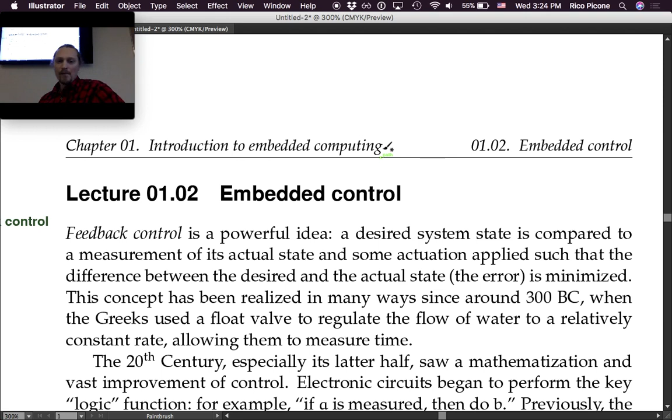So it all revolves around control, though. That's really what we're doing with it, we're doing control. So let's talk about that for a minute. Feedback control is a powerful idea. A desired system state is compared to a measurement of its actual state, and some actuation is applied such that the difference between the desired and the actual state, which we call the error, is minimized.

So, for instance, say we have a height-controlled platform, and it is at this height here. We want it to be at this height here. We measure this height. We know which height we want it to be. The distance between those is the error.

And we're going to do something to the platform, for instance, actuate it with a power screw or something like that, to make it go from this location to that location, to make the error smaller. Zero, preferably. So that's the idea of feedback control. We measure the error, we do something to the system to try to change the fact that there is error associated with it.

This concept has been realized in many ways since around 300 BC, when the Greeks used a float valve to regulate the flow of water to a relatively constant rate, allowing them to measure time. So if you can regulate the flow of water to a constant rate, then you could say, oh, you better be back by five buckets' worth of fill-up. Then it would be a specific increment of relatively constant time.

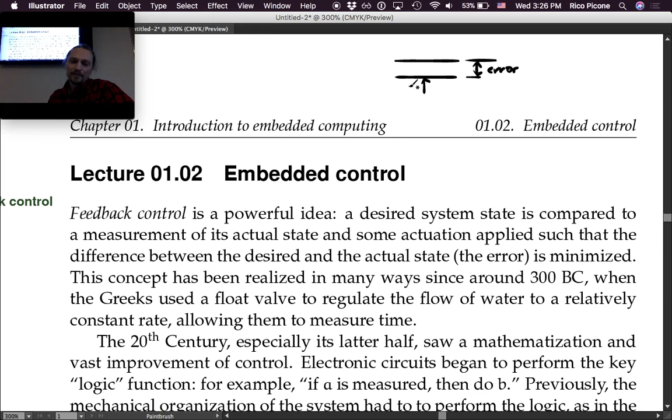And so the Greeks from about 300 BC, that's the first evidence that we have of people using this concept, although it's probable, because we don't have evidence of everything that's happened, that there was something before then that was like this. It's hard to say. Now, this is human-used feedback control.

Biological processes use a ton of feedback control. Our bodies are filled with feedback control systems. A lot of measurement and changing of response based on a certain state. Regulation of body temperature is an example of that, regulation of oxygen levels, all kinds of things have these feedback mechanisms.

For instance, if you try to hold your breath for a long time, all kinds of different system responses will happen to try to get you to breathe, right? If you're asleep, and you're like me and you have sleep apnea, you go to sleep and you stop breathing, your body will wake you up to start you breathing again. And it might even need to use adrenaline to do that, which really sucks when you're sleeping. But yeah.

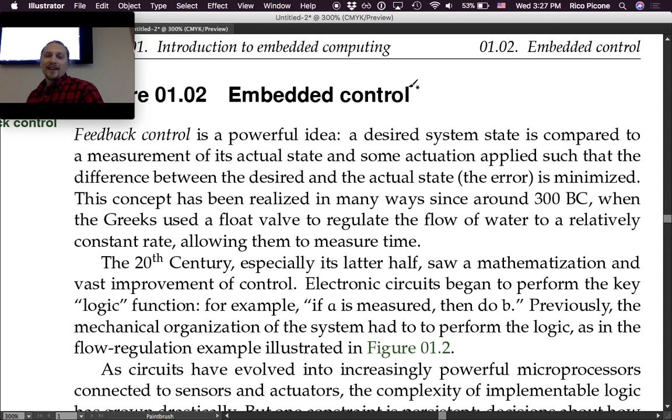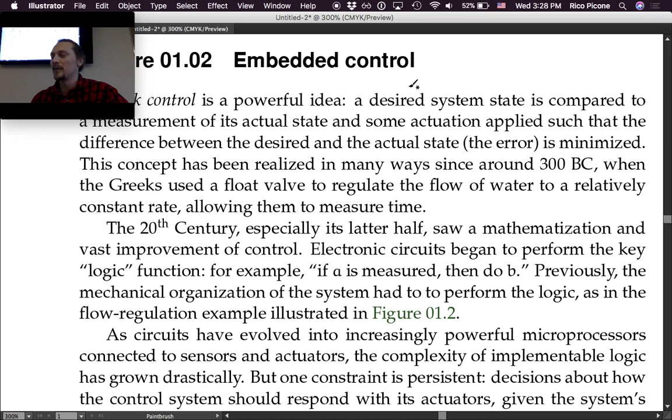Human-created feedback control, we have evidence back to about 300 BC, which is a while. The 20th century, especially its latter half, saw a mathematization and vast improvement of control. Electronic circuits began to perform the key logic function. For example, if A is measured, then do B. Previously, the mechanical organization of the system had to perform the logic, as in the flow regulation example illustrated in figure 1.2.

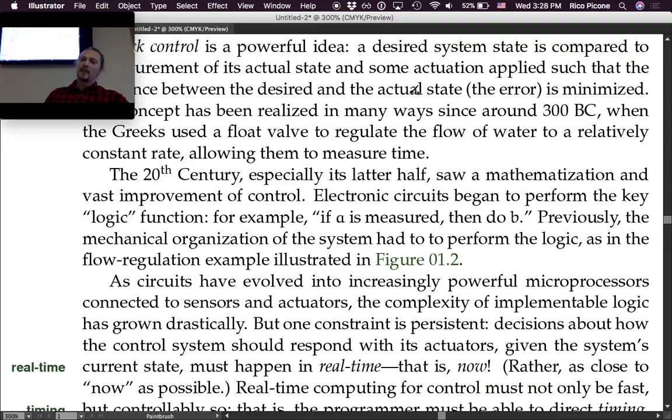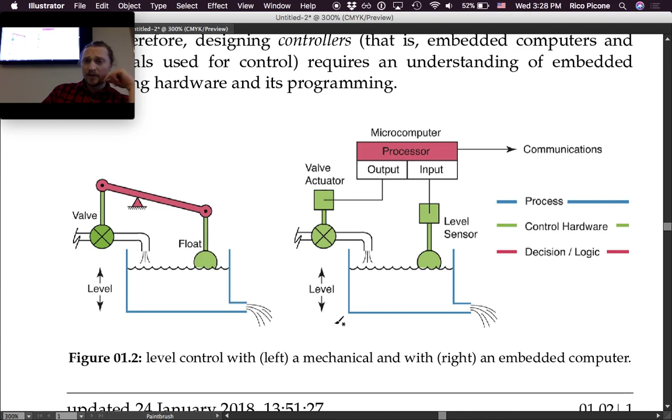So let's go down to the figure for a moment and take a look. So on the left, we've got the mechanical version. On the right, we have the embedded computer version.

You can do this task with the version on the left. If you want to control the level of the water in this tank to be constant, then if this starts to fill up, so say the water level rose to here, that means that your float valve, so a float is going to be something that stays at the height of the water, right? So it's going to rise, it's going to go up,

and the valve closes, or at least gets more closed than it was, and so your input stops or slows, and you're still flowing out. So that means it's going to make the level drop. If the level drops below the level that you want it to be regulated to, then you have the situation where this goes down and this happens, it opens the valve,

and water flows in, more water flows in, faster and faster and faster. The further down this goes, the faster the water is going to flow in until it gets back to the sort of calibrated height, the desired height. So, does anybody know of a system that uses this? Toilet uses this. I mean, at least American toilets do.

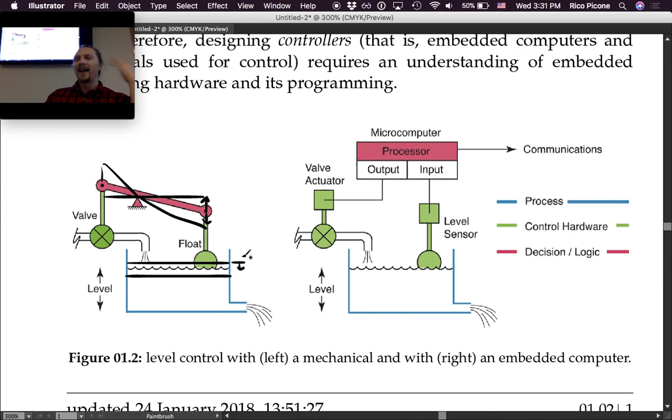It's a pretty good system, although mine gets stuck a lot. You got to jiggle the handle. Probably should open it up and fix it once and for all, but instead I just wait to hear if the thing falls or not and jiggle the handle. So we aren't really very good at making good decisions. We say, I could save 5 minutes right now if I just jiggle the handle instead of actually fix this. And so you do that for several months, and you waste 5 hours of time. So it's great.

And so this is the mechanical version, and it's really good. For a toilet, that's a great system. Works really well. They do break, but not very frequently. It's pretty reliable, cheap, does the regulation. Now, you could replace that with a microcomputer, and you probably wouldn't want to do it on a toilet, although I have seen a lot of electronic toilet stuff out there, so maybe you would.

But most of the time, you're probably not going to want to do that for a toilet, but for a more complicated system, you might want to, especially if you wanted more control than this afforded. This pretty much gets you stuck at a certain level. Once this thing is calibrated, you can't change what the level is going to be, right? On this system, you could easily determine which level you wanted it to be at and change that on the fly whenever you wanted to.

Also the breakdown time, this one in some year might break, but that one might last longer. Yeah, and it really depends on the hardware. So sometimes the mechanical system is more reliable, sometimes it's less reliable. Just kind of depends on what you use. If you use plastic parts over here, those things tend to break pretty quickly, but if it's a nice old tank toilet, it might last for a long time. So this is the microcomputer one.

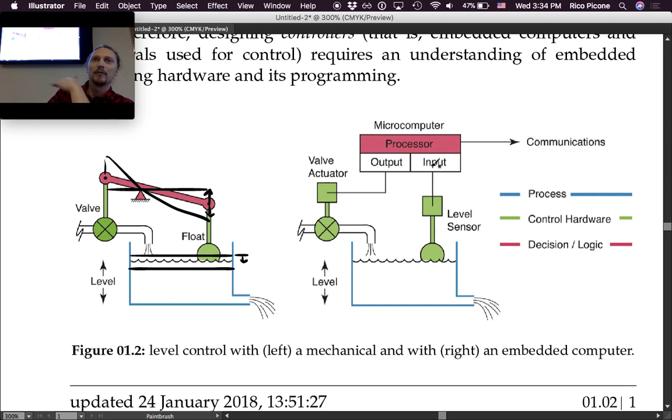and then it puts out a valve actuator signal, say a solenoid signal or a motor or something like that actuates the valve, and it makes the decision about what to do. So notice that it's performing this sort of decision and logic function. So in this case over here, this linkage took us from a movement of the float to a movement

of the valve. And the choice in the lengths of the arms, this one being this long versus this one being that long, the shape of that linkage, where it's pinned, those have influence on how this decision or this logic is being made. And it's cool, and it's adjustable to a point, right? And you could maybe contrive to have an adjustable version of this.

That's the part that the microprocessor completely just substitutes in for. So that's the only part that we're really changing. Everything else is kind of the same. Nothing else really changes other than the fact that the logic, the decisions are being made by the microprocessor instead of the physical system's organization.

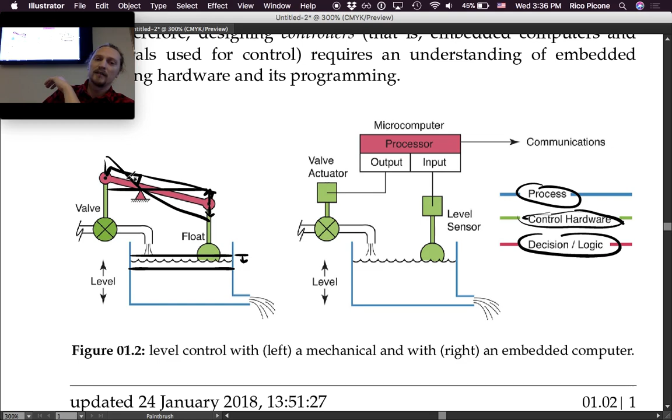So sometimes in a control problem, we're going to talk about three different aspects. There's the process. So that's this tank that has water at different heights. There's the control hardware. So that's the sensors and the actuators. Sensors and actuators are typically called control hardware. And then there's the decision and logic, which happen inside the microcomputer. So this is the same as over here, but the decision and logic, instead of being made by the linkage, it's being made by the microcomputer. All right.

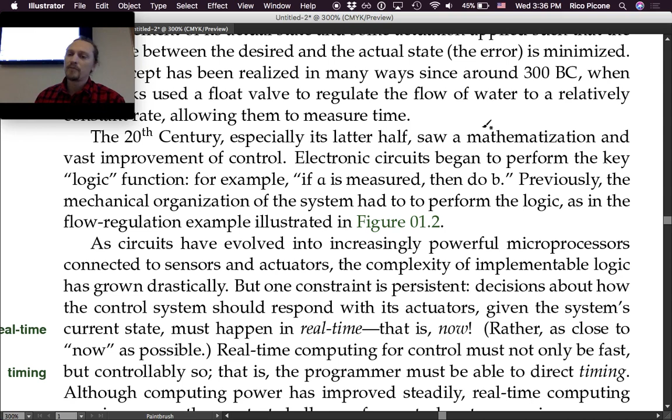As circuits have evolved into increasingly powerful microprocessors connected to sensors and actuators, the complexity of implementable logic has grown drastically. But one constraint is persistent. Decisions about how the control system should respond with its actuators, given the system's current state, must happen in real time. That is now. It has to happen right now.

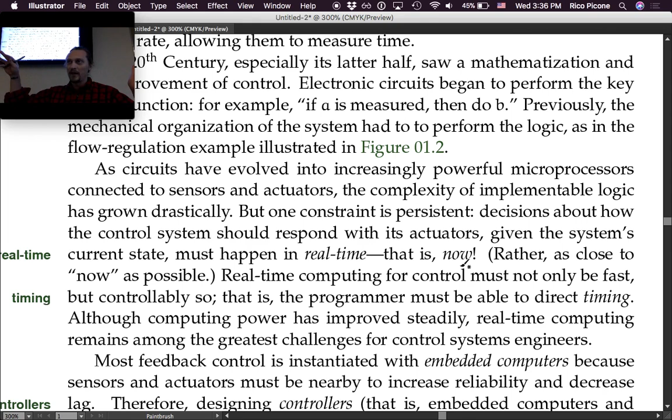So you measure the current state of the system, and you want to change that in some way by actuating something. Like, for instance, you measure the height of the water. You need to actuate your valve in accordance with what you want. Like, for instance, maybe the water's too high. You want it to go lower. You have to put that output, that valve actuator out as quickly as possible.

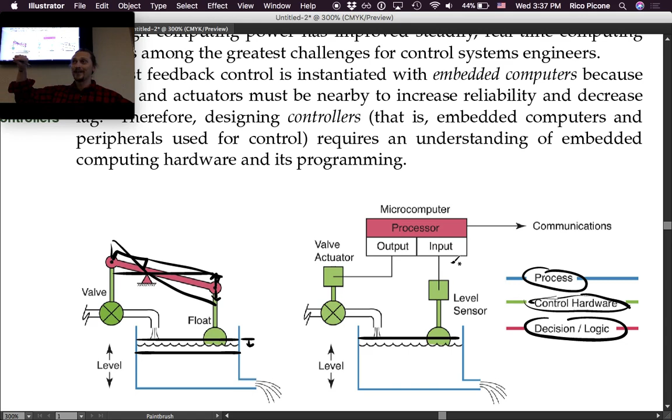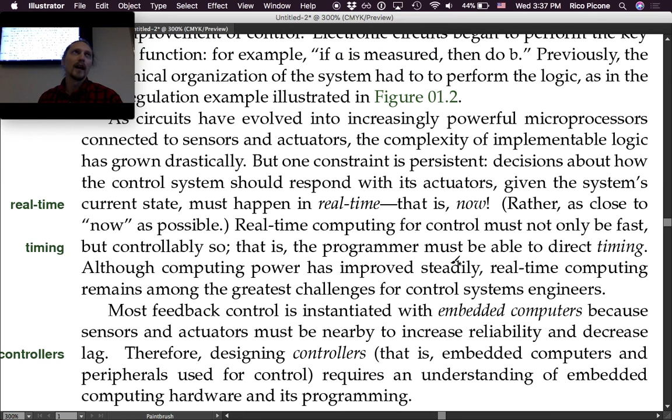Okay? So you can't just take in an input, measure a whole bunch of levels of the water, and then at some point later decide to do some actuation. As soon as you know what the level is, you need to do some actuation. So you have to be doing that. It has to be responsive to the situation. So they call that real-time computing. And of course, we know that now is never quite possible. We're always lagging a little bit behind, but as close as possible if we want.

Real-time computing for control must not only be fast, but controllably so. That is, the programmer must be able to direct timing. This is one of the more difficult aspects of real-time computing, is that you not only need to be able to go fast, but you need to be able to know how fast you're going. So you need to know how much lag there's going to be between this measurement and this output.

You need to know how many real seconds in the real world are going by while you do a certain calculation. So timing in real-time computing is a really big consideration when you're doing embedded computing for control purposes, embedded control. But it doesn't matter as much, I guess, when you're working on a desktop application. We'll wait a second for the wheel to spin, loading. Yeah, so, we don't like it, but everything is as fast as possible.

And actually, we always want it to be as fast as possible, but we don't really have any concept of the real time in the world. When people write software, they might measure the lag, just to see how long it's taking to do a certain operation, doing benchmarks and stuff. But they're not that worried about the difference between, say, 50 microseconds and 60 microseconds. For them, that's roughly the same. Whereas in an embedded computing situation, 10 microseconds might be a significant amount of time to deal with. It might be something that you need to have control over. So, yeah.

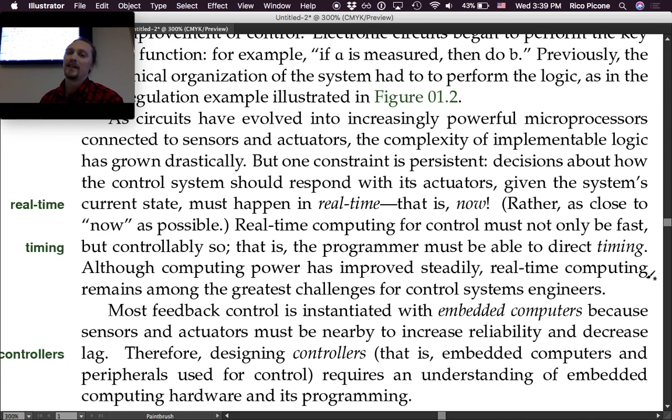So although computing power has improved steadily, real-time computing remains among the greatest challenges for control systems engineers. Most feedback control is instantiated with embedded computers because sensors and actuators must be nearby to increase reliability and decrease lag. So there's no reason in principle that you couldn't, say, have, let's take the example of a car.

Cars have tons of embedded computers in them nowadays. And in principle, you could just have all the sensors on the car, dump all their data into one place, stream that to Google's servers, do the calculation on the server, stream it back to the car, and then make your decision about what to do on the intake or whatever.

But the communication part of that is usually the weak link in terms of speed and in terms of reliability. So most of the time, our embedded computers are there because we want to cut out that link. And actually, that was originally how a lot of computing was done. People would have a terminal, and there would be a mainframe computer in another location. That's what was actually doing the computing, and you had an interaction with it.

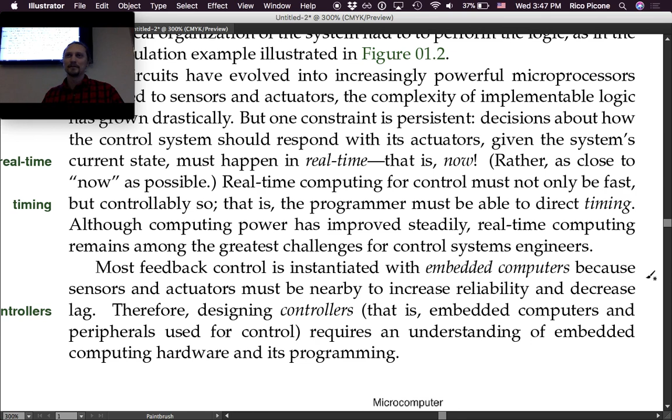So over the next week or so, by the end of this next lecture and a little bit next week, we should have a pretty good understanding of how it works, broadly speaking. Not necessarily every aspect of everything, but we're going to deepen our understanding in certain ways as we proceed through the class. Understanding it at some level, not necessarily the very deepest level, but a decent level. Does that make sense? Yes. Okay, cool. I think it'll become more clear too.